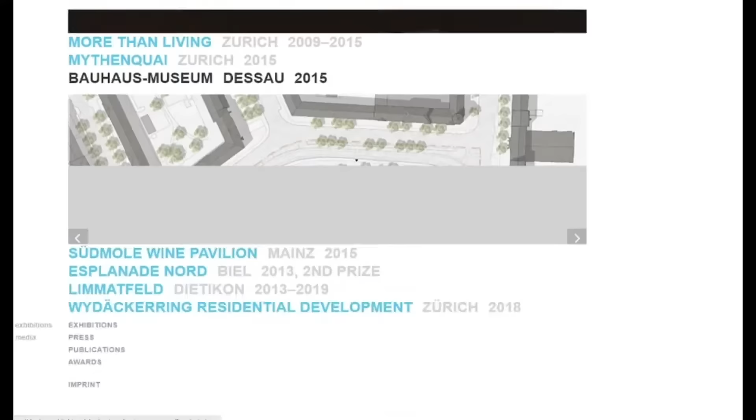Duplex Architects is based in Zurich in Switzerland, founded by Anne Kaestle and Dan Schurch in 2007. And now we have offices also in Germany, in the northern part of Germany, and in Paris. So I'm one of the operating partners of Duplex Architects.

The delivery was in 2013 and 2015, because that's part of the project, that it's a really long process of discussing and developing the different parts of the project. So we develop different projects with the same approach. But what is really interesting is that the idea of More Than Living is that it's not only housing, but it's also a whole urban area we are developing.

There's a kind of density which was quite interesting already in the project More Than Living. The density is the ratio between the area, the land, and the square meters you can build. And so in More Than Living we are around 1.6, which was okay, which was normal. And now we're going for 2.6, so we try to densify the project to get more space, quality space from

left land. So the project is basically, this is the zoom of the Zurich area. So you have the Zurich Lake, the airport. So just in the middle between the city center and the airport, kind of a more industrial site. Used by the Swiss television, next to a motorway, next to the railway. So it was not the best quality site.

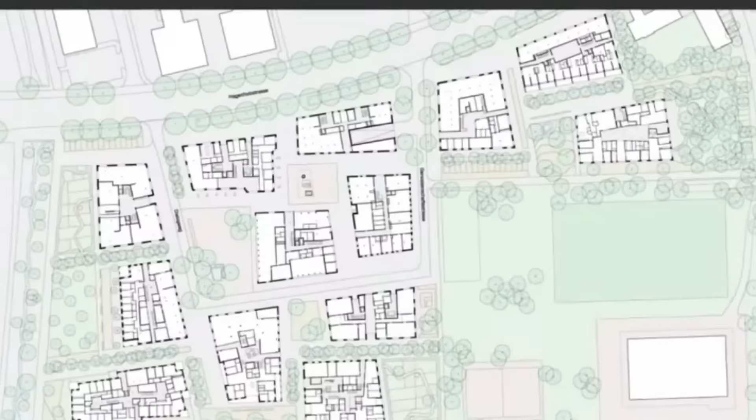Each block has a different approach to the constraints, because the blocks are big, they're deep, you need to bring sunlight inside. That was the challenge for each office. They took our typology and they took our design to develop their own typologies. So we have a really huge range of different solutions within the project.

The power of this project is as well that it's not asking for new urban rules, which is a long procedure. We stay within the actual rules. So all the distance between the buildings, the distance to the road, the distance of the views, everything is developed according to the normal standard urban rules.

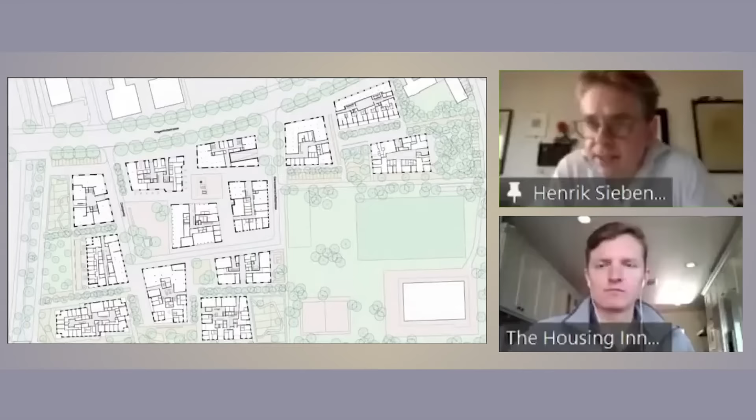Cluster living, what we have developed, is like a box in a box. You have your small entity, which is the most private, your bed and your private room, but you have a bathroom, you have a small kitchen. Next layer is then a shared space. You have a bigger kitchen in the common space. Then you have the staircases, which are a different type of shared space.

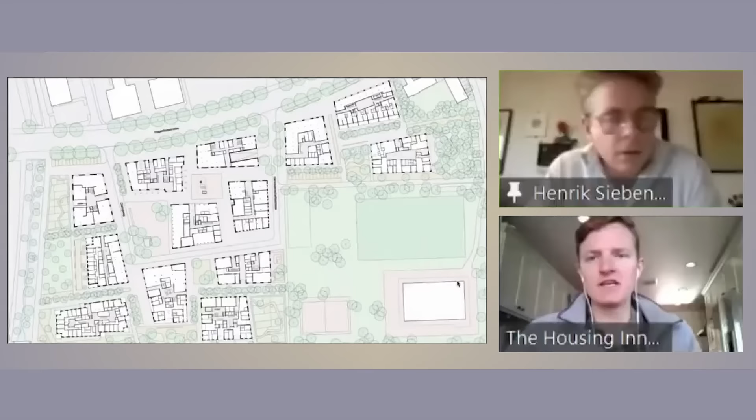And then you go to these workshops, because there are lots of workshops foreseen, or spaces which you can use for birthday parties or for bike repair, whatever, or a recording studio. And then you have those outside spaces. Each building is nearly composed as a small city. Each building is about 100 people, 35 units. 13 blocks and 450 units.

A kindergarten, 3 restaurants, a bakery shop, laundry room is in the basement, and it's common. Everyone uses it, so you don't have your washing machine in your apartment. Like this co-living as a student, what you used to do as a student. This concept might go on. I mean, why not using it while you're working or while you're older, and why not having several generations

in your house? And that's exactly the idea of the cluster living. It's like a very small neighborhood, different degrees of neighborhood: you have those you are living with within one cluster, then those on the same staircase, and then you have the surroundings. So you see those 6-story high buildings with a very strong neighborhood.

When you want to build with a cooperative, roughly $33,000 you have to pay to get in, and then you're part of this story, and you're allowed to get one of the apartments. And the rules are defined, and within this project and lots of projects, you need to engage that you will not own a car. The time you're living there, you won't use a car. You engage yourself on car sharing, on mobility. The parkings we have foreseen are for guests or for other reasons. So there's no more parking space than really the minimum needed.

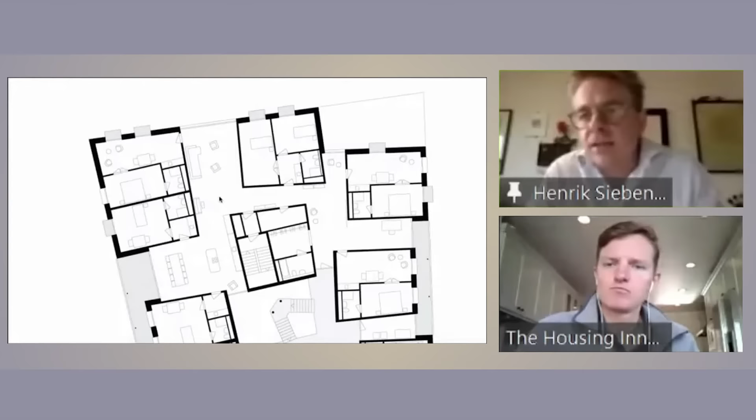And each of those groups is organized as its own association. So the cluster, in this case, for example, you have 7 different groups joined together with this common space. They have created their own association with their own rules, with their own bank account. You're really living together. You care about the other one, and everyone engages in case of fire, for example, to look after the other neighbor.

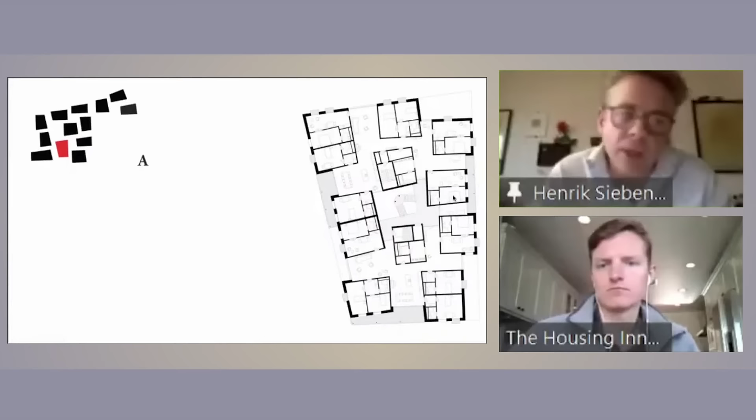You have the shared areas in between the units, and this is one example. It's been furnished by the cluster inhabitants. You can watch television in your own room, but you can also share. And this is what's really interesting. There was one guy who told us, look, I met more people in 7 days within the project than I have met the last 7 years.

Who is forming these extended families? We did workshops, with also a more traditional layout, but able to choose your favorite apartment and what suits you well. And normally it's a lifetime project. Stay within your cluster. Normally in those kinds of housing, you don't have a large turnover. You leave, what happens?

It goes back to the community, kind of owner, because you can't be kicked out of your apartment because you own it for lifetime. You can't give it to your children. If you want to move out, you get your entrance fee back, but that's all. And then you're just off.

And then the organization, the cooperative, they do have an office within the building. And here the investor, which is the cooperative, they are running the project. So they have the funding, they have the experience, the banks are financing projects, they have all this professional knowledge to run a project. Gathering together and doing the project and having the professionals doing the project for them.

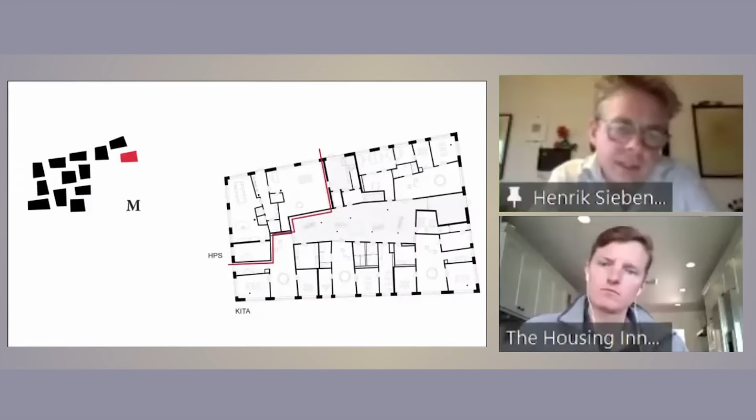And this allowed ourselves as well to get those details of a kind of sculpture within, bringing light into the buildings. This block allows to have a good energy performance, just 5 kilowatt per hour per square feet. The thickness of the walls on the outside is 50 centimeters, which is 1.6 feet. So we have really thick walls. It's a kind of brick wall.

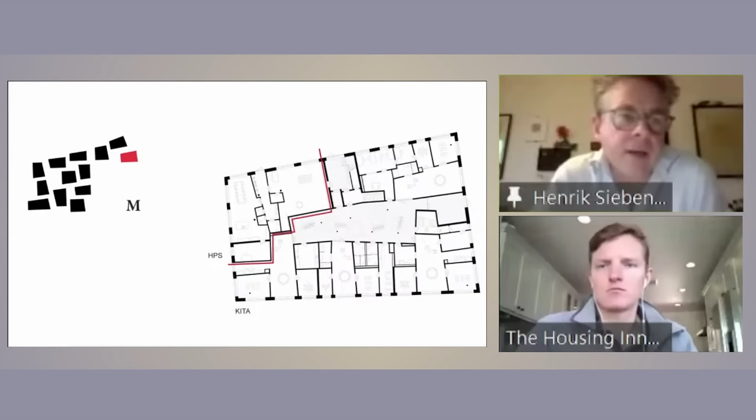Inside the brick, we put in insulation. So we have volcanic stone inside the brick, and it's like a traditional brick layering. And inside, it's the thermal insulation. So on the outside you just have your normal facade, and on the inside you have a plaster wall, and that's all.

We have supported other architects on the side. A standard balloon frame. There's one house with foamed concrete. Inside the concrete you have foamed glass elements, which are doing the insulation. So that was quite experimental, but it worked out really well.

It's 100% site built, but nevertheless we have calculated the block as a standard element, so you don't want to cut it on site because it takes lots of time. So we have adapted the openings to the size of the bricks, so that we can use full bricks and we don't have to cut them. So this was all designed so that we are very fast because we don't have to adjust it on the building site. It's like a kit of blocks.

Exactly. It has the advantage that everyone can do it. I mean, you don't need special technology. It's like brick structure as we use. So almost every worker, craftsman can build up those houses, and at the end of the life cycle you can completely recycle them. The philosophy of our company is use simple materials, respect the materials, don't try to put everything together, don't glue things, don't like composite materials. Stay simple but clean, and then you can recycle it as well.

We have a kind of crossover of different ways of living, creating office spaces today, hotel lobbies, and they look like a living room, or we are creating restaurants like kitchens, and be more flexible about new living forms, new ways of living, and let us give the power to the people to create their own way of living. And they say, if you're developing above 10,000 square meters, you need to have more architects together.